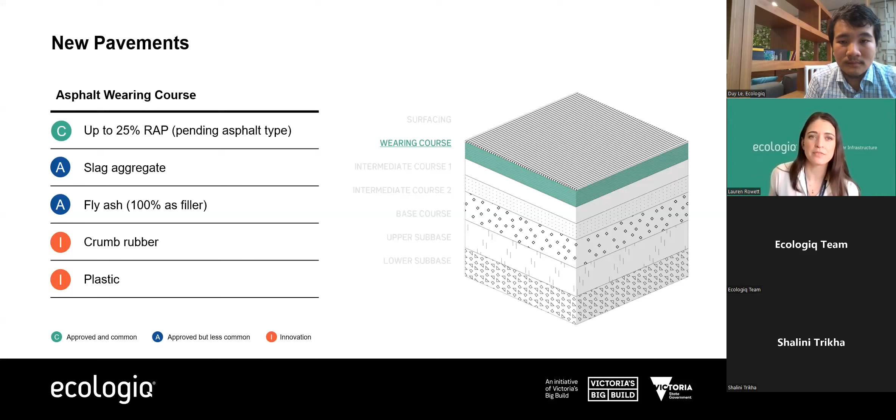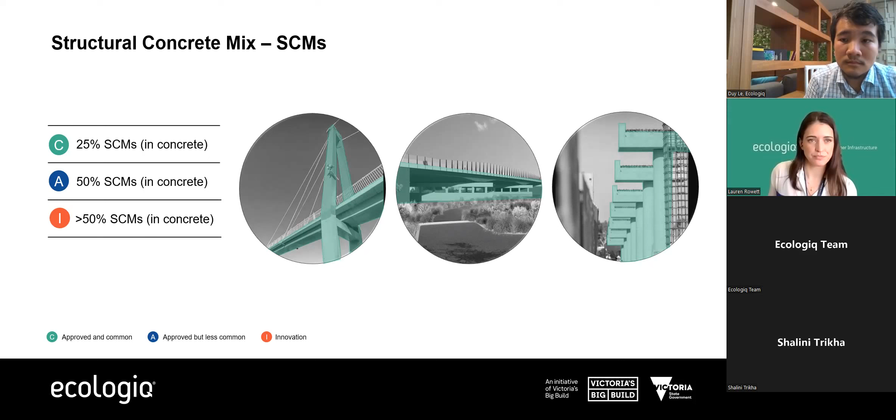Thanks, Lauren. Talk a little bit about a great case study that was actually featured early on in our Lunch and Learn series, I think it was late last year, earlier this year. The Western Program Alliance and the Level Crossing Project actually pushed the boundaries in terms of innovating and went beyond 50% SCMs in their concrete mixes. The mixes for structural piling, it was a project that was delivered with Holcim, Vic Roads of DOT, McConnell Dowell and Arup.

What they found there is significant obvious savings in carbon. We know that concrete is responsible for 8% of global carbon emissions globally, so any way that you can replace that is going to be a real win. By pushing the boundaries with that, the project had to seek approval from DOT, or Vic Roads as it's formerly known, and they were able to come up with a 61% recycled content mix, and again with that met the performance requirements of a 40 MPa structural concrete.

So great case study. If you do want to find out more, you can reach out to the Level Crossings team at Western Program Alliance, and they're happy to have a chat to you about how they went about that process. Thanks, Lauren. Thanks, Joy.

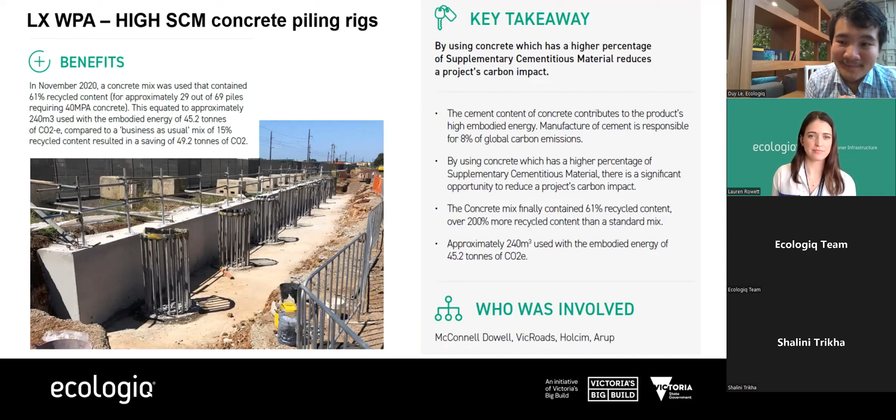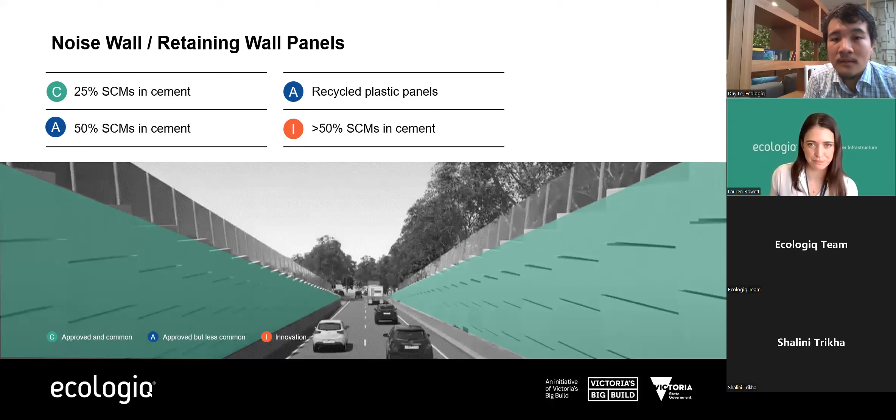Some of you may have seen the Mordialloc Freeway Major Roads project was touted as the world's greenest freeway and construction project, partly because of those recycled plastic noise walls made of 75% recycled soft plastic - that's the really difficult to move plastic that you bring to your supermarket. Noise walls really are only limited by your imagination.

They've been used previously on the Peninsula Link Freeway and the Monash Freeway. That's a concrete noise wall, but as those panels have deteriorated, they've been replaced with recycled plastic copies to fill those in. So when you're driving along the freeway, they're indistinguishable from other concrete products.

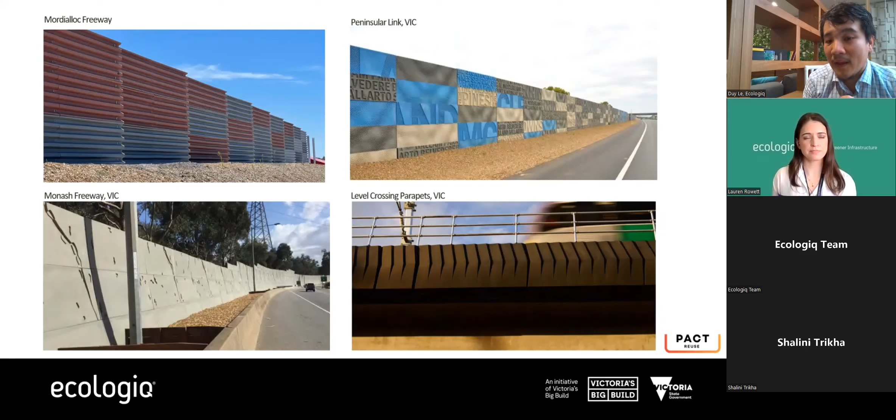For the Level Crossing project, they found those particular panels are made with 50% recyclate. The advantage of plastic is that it can be rotomolded, meaning it's hollow and lightweight. Not only can it put away a lot of plastic waste, but it has gains in weight saving and safety when handling at heights. Similar panels are being explored right now for other projects like Melbourne Airport Rail with elevated rail viaducts.

This trial has research from Melbourne University finding that it meets the Australian Austroads national standards for noise walls. So this project, Integrated, is now looking for a project to trial this type of noise wall to meet Victorian Vic Roads or DOT standards. If there are any projects out there looking to set up noise transmission absorbing walls, this is one to look at - another innovation. This stuff is made here in Victoria, and it can make a huge dent in our plastic waste problem.

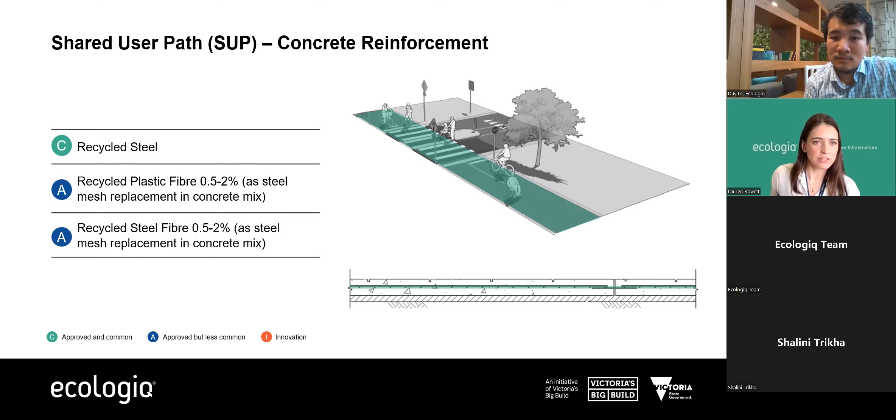The next one we're going to show you is shared user path, and here we're actually looking at the concrete reinforcement. You've got the diagram showing where a shared user path is with cyclists and pedestrians along it, and underneath, the technical drawing showing the reinforcement that goes right through the middle. This sits in non-structural concrete, and there are a few different plastic options as well - not always steel.

At the moment, there's a product on the market called eMesh. I'm sure many of you have heard about this already, but I want to take the opportunity to answer some questions and dispel some myths about its use. Firstly, there's significant carbon reductions in using eMesh, mainly because it replaces steel, which is one of the most carbon intensive products we mine for, and because of the weight of the product.

Your carbon offsets are already there. It has been used extensively across Victoria by some local councils on level crossing and major road projects, mainly in shared user paths. But it's actually been used for almost 20 years in Queensland, where despite some concerns, they found there's similar or superior performance to steel reinforced concrete, and superior properties in resisting - obviously plastic doesn't rust, but also resisting acidity and things like that in soils.

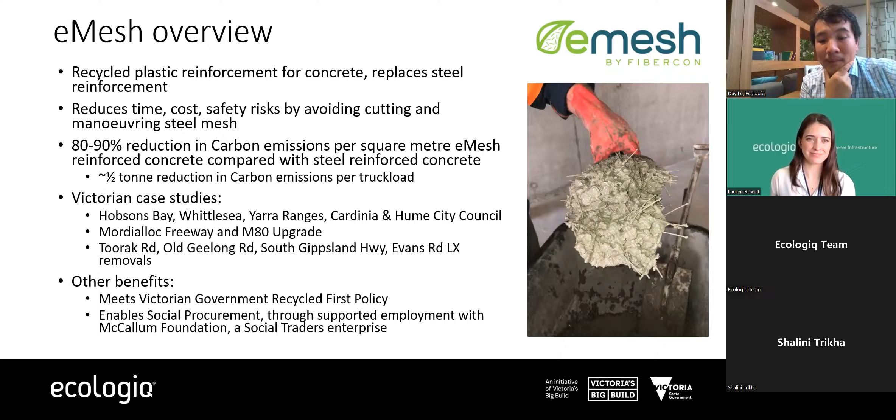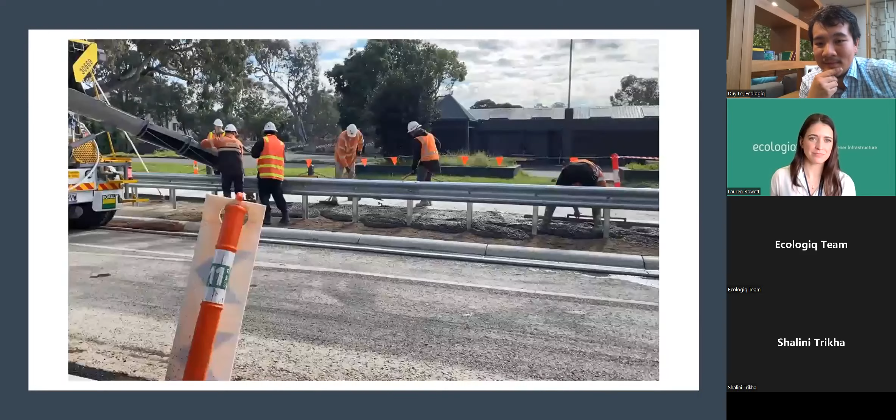From a workability standpoint - and that's the final product there, shared user path. There are some considerations in terms of workability when using eMesh.

That's in terms of finishing and pouring, but the important thing is that the subbies who have been using eMesh and pouring the stuff have found that once they understood the workability, it's been faster to lay because it's quicker to work with than laying down steel reinforcement. There's also reduced safety concerns. You can see from the finish that if it's done correctly, there won't be any eMesh protruding from the shared user path or any plastic fibers sticking out. Those fibers are UV stabilized, so even though they have a 40-year design life, they're expected to last a long time without degrading.

The next one we've got here is conduits. Conduit reuse is approved but less common - obviously, with all reused products, they must be serviceable and approved for their intended use. And then we've got recycled plastic as an innovation, something that is ready to trial, and in fact is in trial currently.

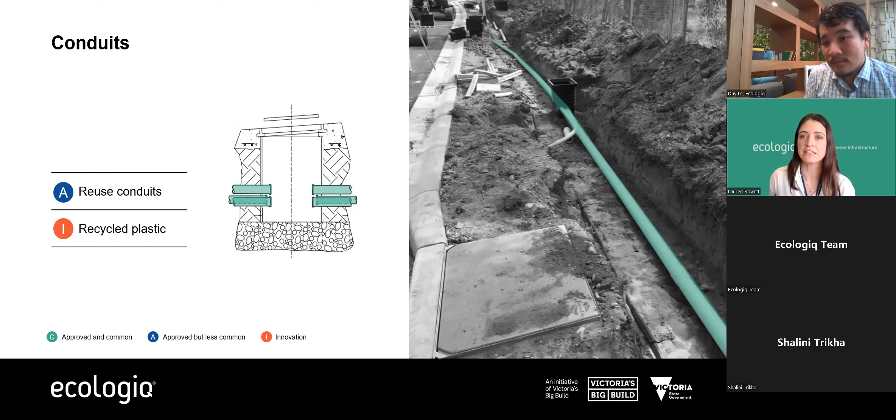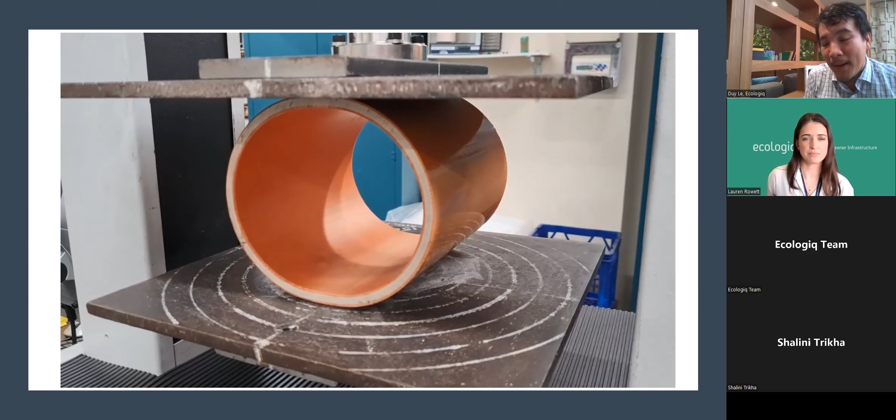So this is what's called a sandwich layer conduit construction pipe, where that white intermediate layer is made of recycled PVC, with virgin plastic only used on the outside. This is approved by V/Line for use, and the Shepparton Corridor project has laid over 130 kilometers of this conduit pipe. At the moment it's undergoing review by DOT, hopefully for approved use across Victoria.

It's important to understand why these conduit pipes are only 50% recycled in the center - it's because this is what 100% recycled pipe looks like. At the moment you can purchase from RPM Pipes and Green Pipes a 100% recycled drainage pipe. The only issue is obviously the color varies, and this is one from another manufacturer, Green Pipe. Since you can't control the color of recyclates, the industry has found a workaround with solid core recycled construction pipes. That's what those conduit pipes are for, and hopefully they'll be approved for use shortly across Victoria.

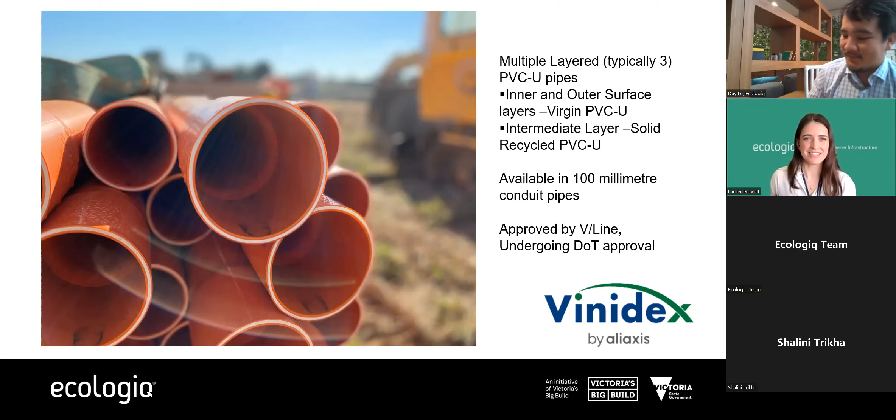This one's conduit bedding. As you can see, it's the same photograph we saw in the slide before with the actual conduits, but with a different part highlighted in green. As you go through the guides, you'll see some photos used multiple times, just highlighting a different section. Again, you've got the diagram here showing where the conduit bedding actually is, which in this case is a replacement of 100% recycled glass sand.

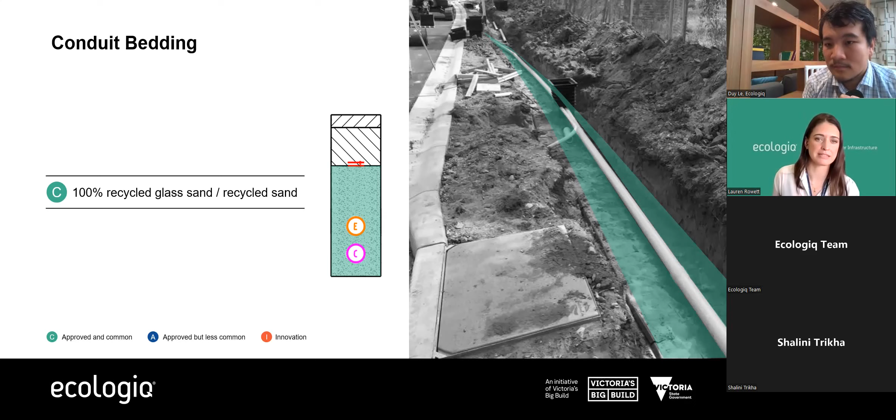Speaking of recycled glass sand, that can also be used in coloured surface treatments and line markings. Coloured surface treatments are very common, and line markings are a bit of an up-and-coming product as well.

One of the ones you can use right away today, no trial needed, is Omni Grip's high visibility surface treatment. This has actually been used already by the Level Crossing Removals Project at Reservoir Station - that's a photo of the surface markings at night. I thought we could do better and actually show you what it looks like in real life, so that's a sample there, and you can make it in different colors depending on what sort of pedestrian crossings, bus lanes, or surface treatments you need.

My understanding is the reason this hasn't been picked up more is that line markings and paint surfacing are often left to our subcontractors on projects. So if you're looking to use this, make sure you specify recycled glass sand or recycled products as an option when it comes to line markings. Otherwise you might end up with just whatever cheapest paint and line markings are available on the market at that time. Great product again here - Omni Grip, Smarter Road Safety makes them.

I do want to talk about recycled glass sand for a moment, because every time we run these sessions we get the same questions coming up around risk and handling, OH&S and silicosis. So I actually have a sample here of recycled glass sand - I'm not sure if you can see it there.

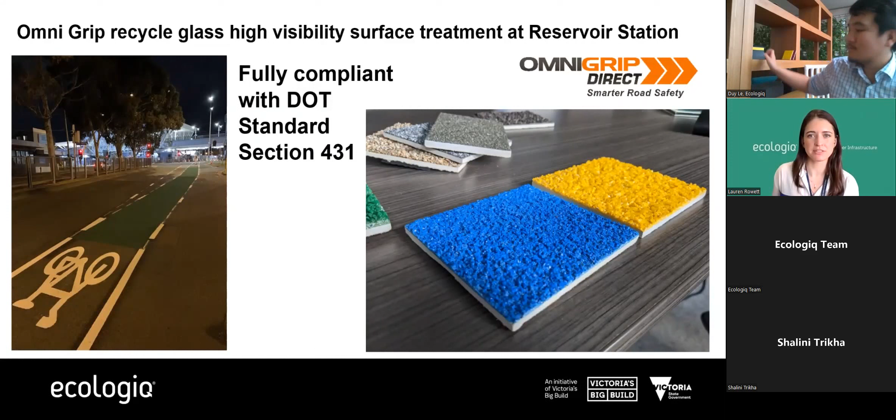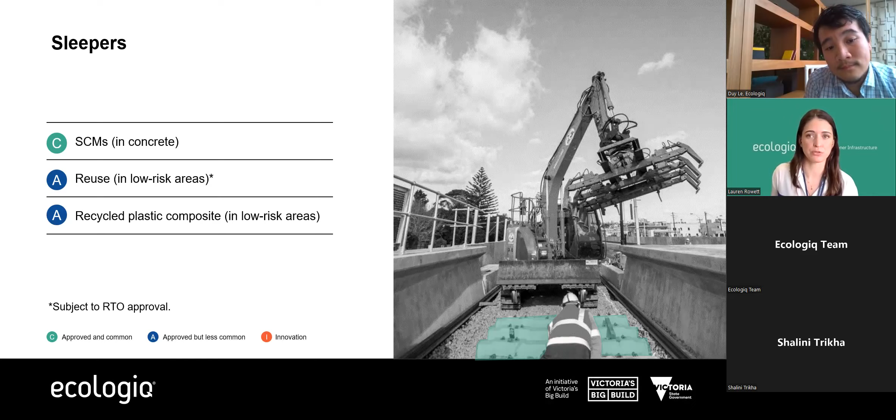This is a real story of homegrown success. Integrated Recycling manufactured the DuraTrack sleeper, made from recycled plastics right here in Mildura, Victoria. It's already been type approved by MTM and V/Line for low speed use, so for the regional rail revival program, level crossing removals program, stabling yards, low speed sidings, turnouts, and any low speed application, you can use the DuraTrack sleeper. It's a great sleeper in terms of timber replacement.

At the moment it's still undergoing trials with ARTC. Again, in terms of putting away tons and tons of plastic, these have at least a 50-year design life, but are expected to last a lot longer, easily outlasting timber sleepers, which need to be replaced every 15 years on average. Great product.

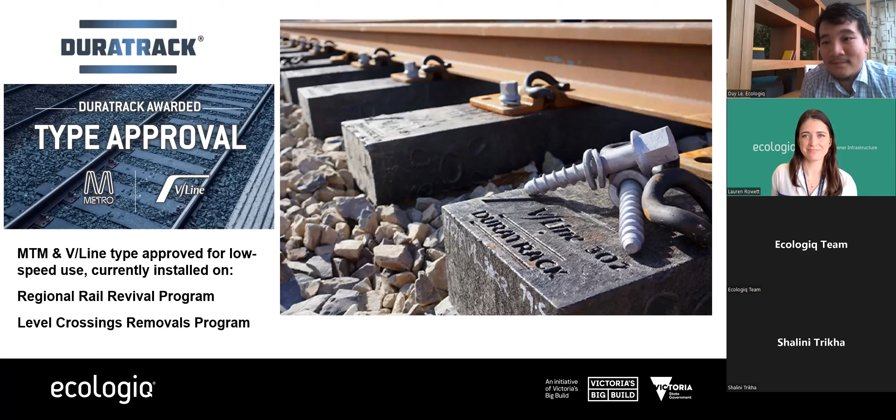Next we've got, here you can see a few different options. They're all approved but less common, so really good opportunities to optimize on projects here. And Duy, I think you have a wheel stop with you as well that you can show us.

I do, so we have a few samples of these. These ones are made by Plastic Forest, Australian made right here, I think in Albury, just across the border. When speaking to projects, I visited one recently and saw them installing wheel stops in car parks. We asked them why they hadn't considered recycled wheel stops, and often this is left up to the subcontractors to decide what products go into there.

Now, these meet Australian standards. I've seen these installed in places like Kakadu National Park, in the Northern Territory, and in far north Queensland, where they recognise the benefits of using a recycled plastic wheel stop rather than an import, which is what these often are. So my key messaging is don't skimp out on the ancillary applications, each one of these packs away a significant amount of plastic.

For me, it's quite a significant paperweight that I don't need because I don't have much paper on my desk, but certainly when it comes to wheel stops and parking bollards, have a look at that as well, because whether you have recycle-first requirements or are trying to meet sustainability targets, it's great to explore and make sure you're maximizing and optimizing every opportunity on your projects.

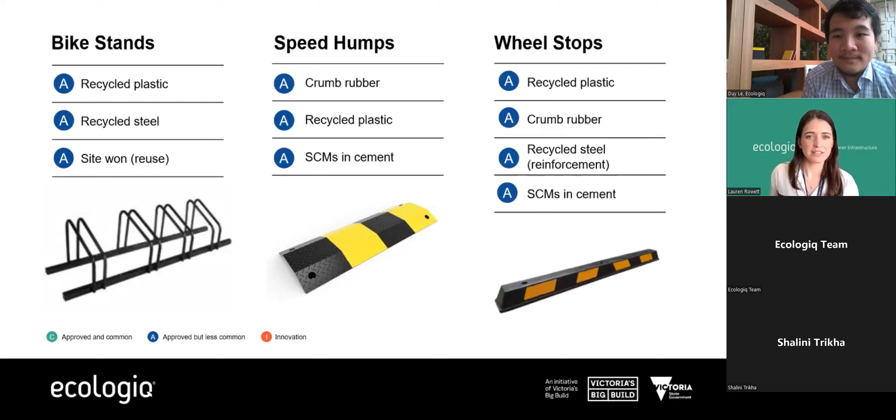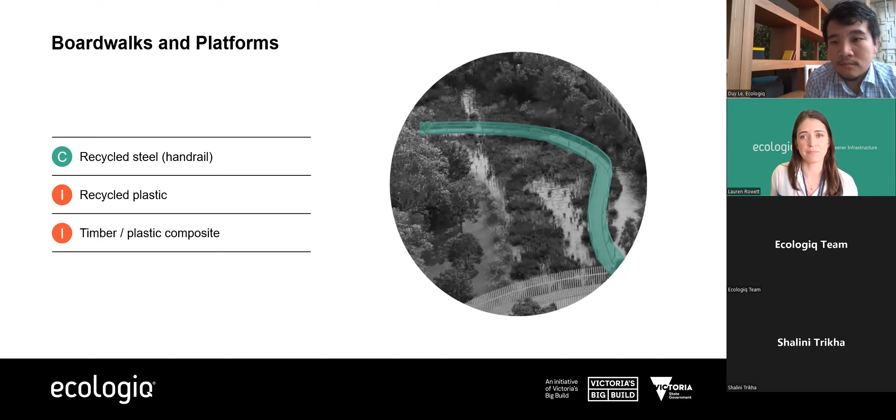Although it's an innovation, recycled plastic has actually been used quite widely for boardwalks in places like national parks, and you often see them leading down to beaches as well. So there are lots of use cases, but just an example where it hasn't quite cracked the transport infrastructure space yet. And then functional fitness equipment as well - we've seen a few designs come through lately that have a bit of gym equipment, so there are actually some recycled plastic alternatives for those too.

Thanks, Lauren. I just want to take you on a quick tour of some of the recycled plastic products already available off the shelf. The key messaging here again, when we speak to the manufacturers, they are looking to hear from you what you want. Recycled plastics can be made to look like existing products, and as you can see here, some of these are meant to look like timber or potentially like steel roofing for shade structures.

Steel roofing for shade structures. If anyone's building a boat launch ramp, you can use them as well. Obviously, being plastic, it probably is better in a marine environment than other products. You jump to the next slide, please, Lauren.

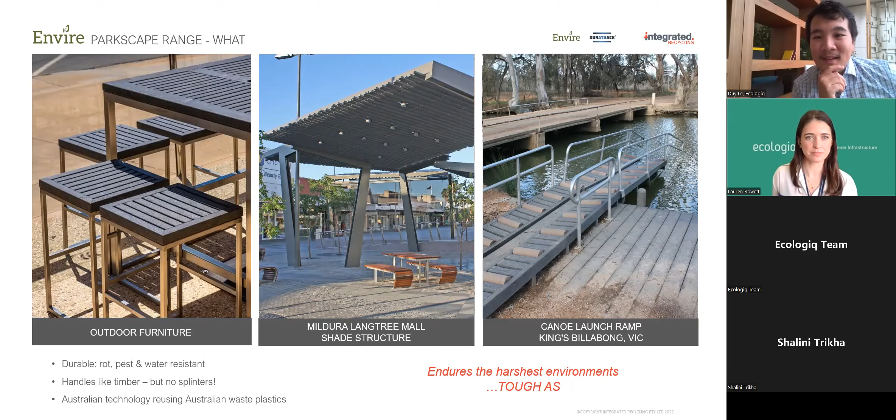But boardwalks, retaining walls, and bollards as well. So this is a range that's made by Integrated. They use agricultural plastic waste in their manufacturing, and it's up to 85% recycled waste.

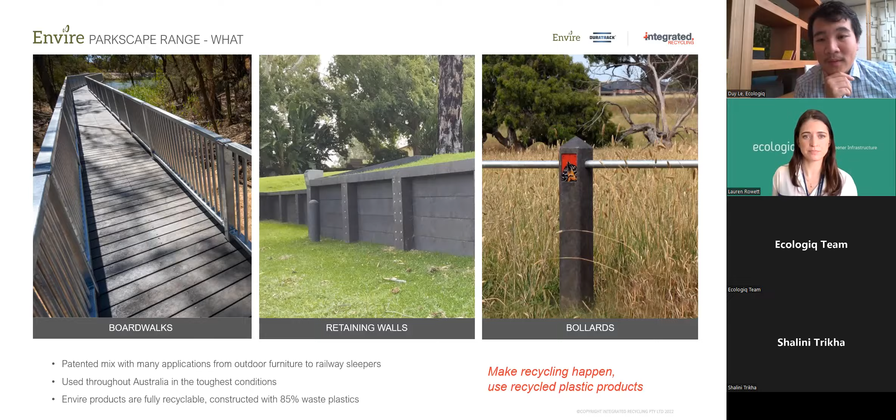When we jump to the next one, we'll have a look at some of the products made by Replas. Replas actually use the soft plastics from the Red Cycle program. So if any of you are taking your soft plastics and chip and chocolate bar wrappers back to your supermarket, this is what it's going into.

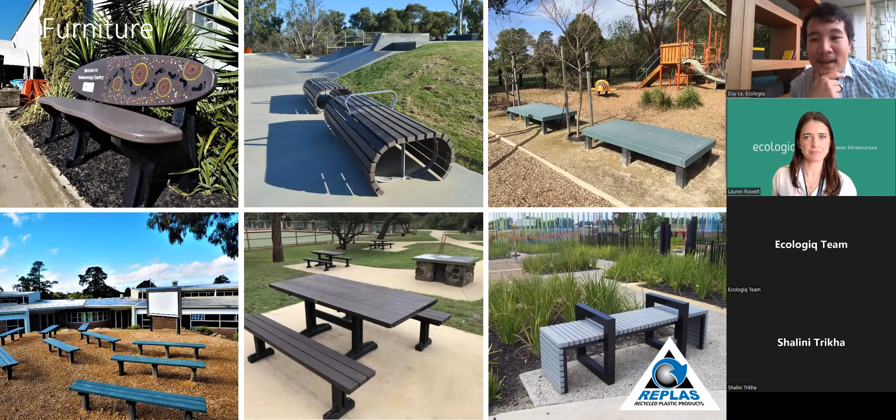Again, with all the different park benches and options available to you, I think we do want to dispel the myth that recycled plastic can only be turned into your bins. So I think you could see here that the range is quite exhaustive, and the options are really only limited by the imaginations of any designers and architects that might be here on this call.

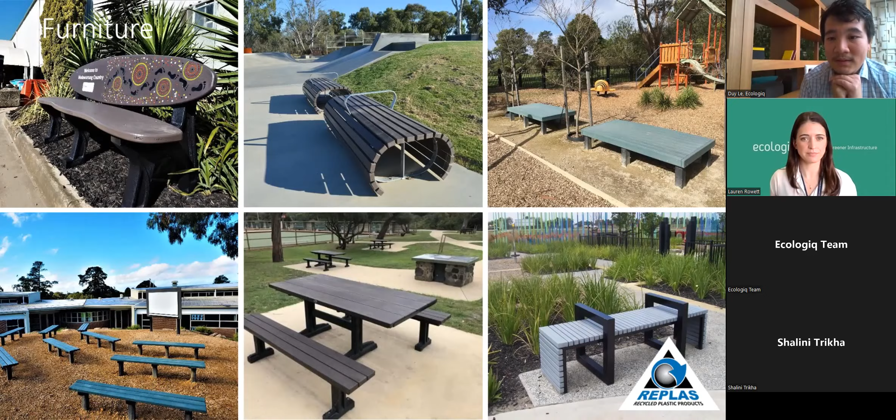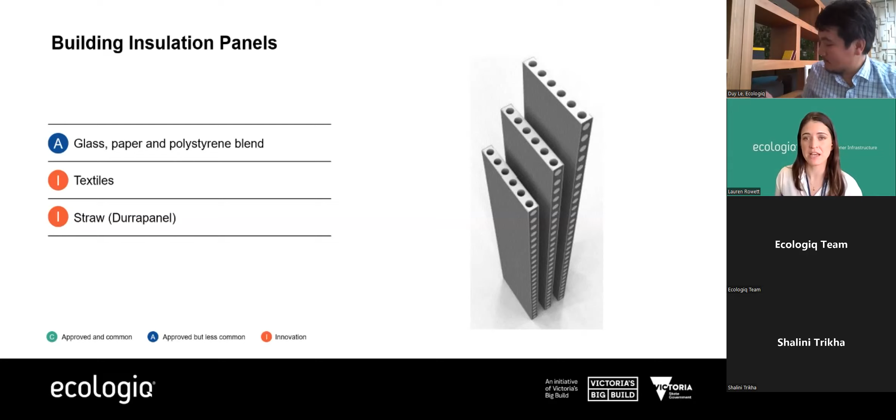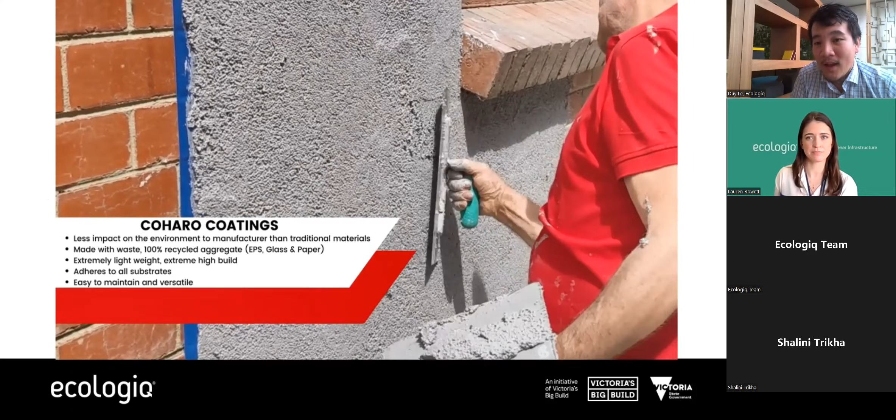But also glass, paper and polystyrene blend, Duy. Yeah, so this is a great little product that's available right now, called the Coharo coating by Casafico. That is a leveling coat. It's not shotcrete, but if any of your projects are using shotcrete and you need to do a follow-up leveling coat, you can use the Coharo coating. It can be applied by hand, as you can see the gentleman working with it, or it can also be sprayed on. It's made from 100% waste, and it's been used in the Melbourne Metro Tunnel to do some leveling works down there. So although they may appear small, it's a significant use of really problematic waste like polystyrene, glass and paper.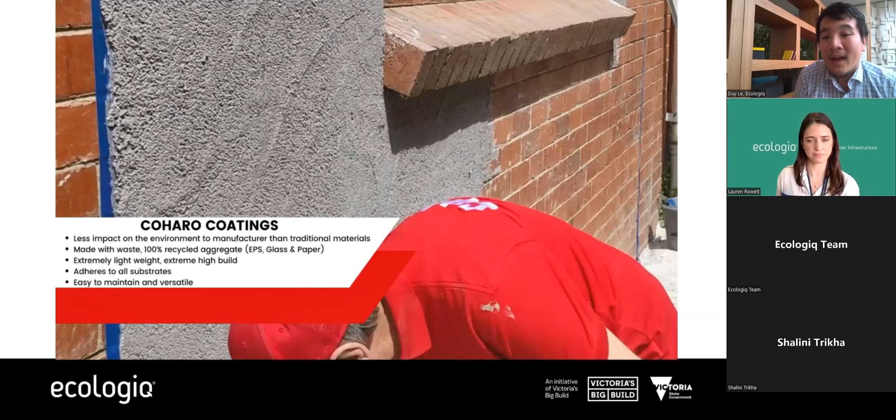Thank you, Lauren. I might take a moment to talk to you about our reference guide. Lauren said earlier that the visual guide is best used as an accompanying piece to our reference guides. So for those who don't know, ecologiq has issued now 4 reference guides that are freely available on our website and also on our Knowledge Hub. And the reference guide acts as a one-stop shop, a bit of a handbook that's collected all the standards and specifications that permit for the use of recycled materials.

So you need to jump to the first one, Lauren. So we have a reference guide in road infrastructure. This guide actually collects—we've reviewed the Department of Transport and also the Australian standards, and identified all the relevant standards and specifications that permit, or that are performance-based, that allow for you to use recycled and reused materials.

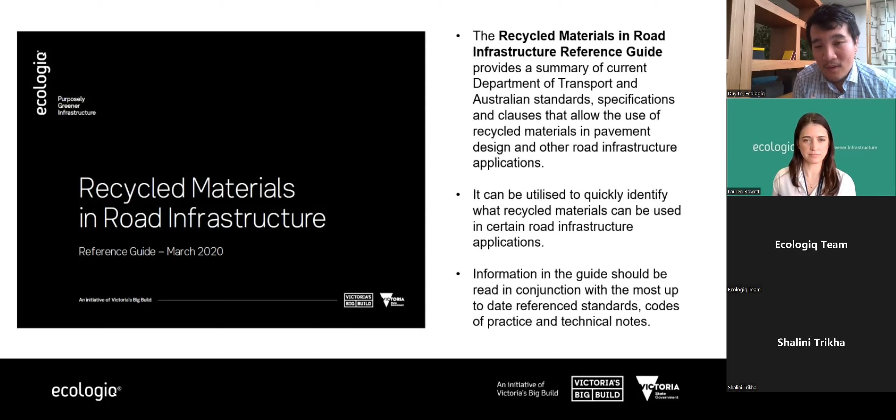It's a common barrier that the first question we often get is whether this is in standards or spec. I say consult the guides because a lot of work's gone into collecting this. You can see when you open up the guide, you can look at it by material application, and see what materials are permitted. So if you're looking at pavements, you can see what recycled materials are permitted. Within the guide there are live links to the actual relevant standard or specification, so you can look up exactly where it permits the use of that.

I'll add a proviso that these guides were first published in March 2020. We're going through a review currently, and for the next iteration, our technical team has been doing a lot of work with DOT and other bodies to reform new standards and specs. For example, if the conduit pipes we spoke about earlier are finally updated, you'll see them show up in new versions of this guide as well. The next version will also include road stabilization, an area well practiced in other states but hasn't seen the same level of adoption in Victoria, despite the advantages of stabilizing and recycling existing roads before building new ones.

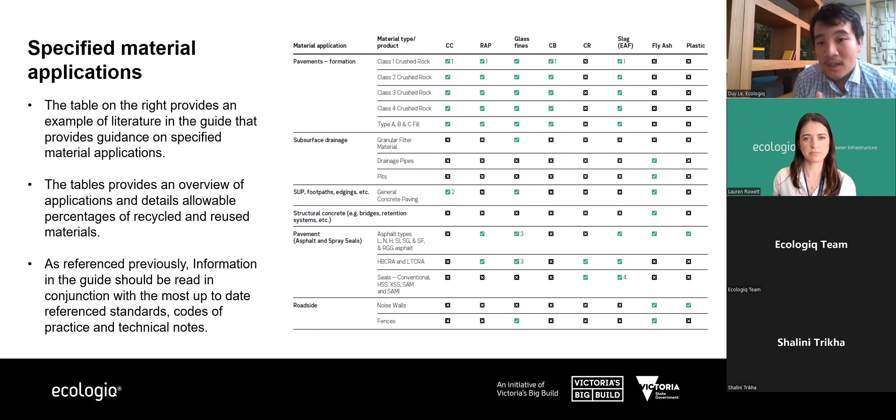So next slide. We also have a guide to rail infrastructure. Here in Victoria, if you want to use recycled materials, often if they're safety critical, you need approval and type approval from the rail operators - so that's MTM, V-Line, ARTC, and if relevant, VicTrack as well.

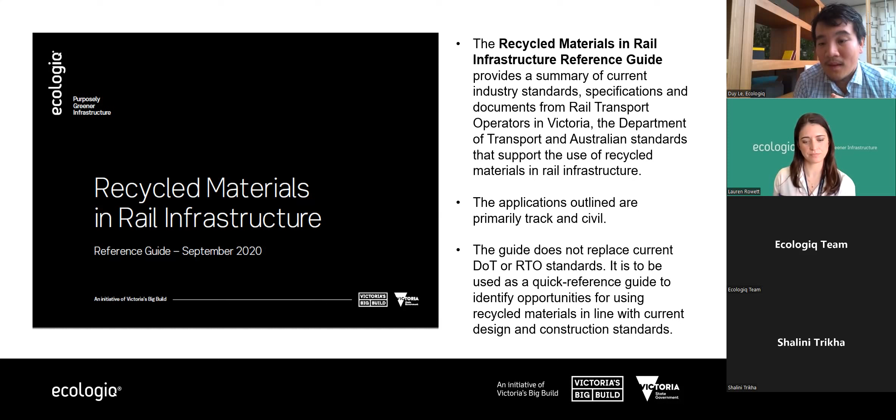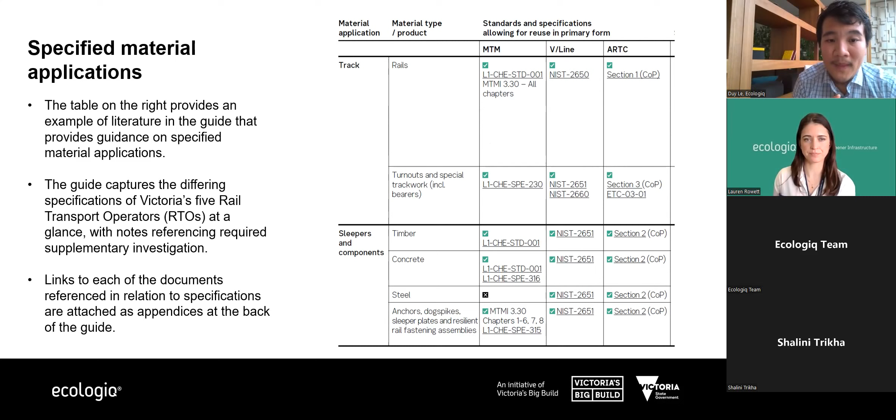We've collated all the standards and specs from those operators. If you jump into the rail infrastructure guide, you'll see things like the standard and specification for reusing track or using different sleepers. Again, the document has live URLs where you can look up the application you're looking for, click on it, and it'll take you to the right type approval, standard, or specification that permits the use of that application and material.

And last but not least, as I've mentioned before, ancillary - I call this the other - so all the bollards, fencing, everything that isn't road or rail but has significant application. From landscaping to roadside fencing, it's often non-safety aspects, but can certainly make a real big difference in using our recycled and reused waste streams.

If you jump into this reference guide, it covers everything from signage, pavement markings, pipes and pits. Again, this collects not just DOT standards but Australian standards as well, for what applications and materials you can use. For anyone looking to use our visual guide, I do say to really consult the reference guides as well, because that will show you the standards and specs that allow for the use of these materials. We should be republishing new versions of these by the end of the year.

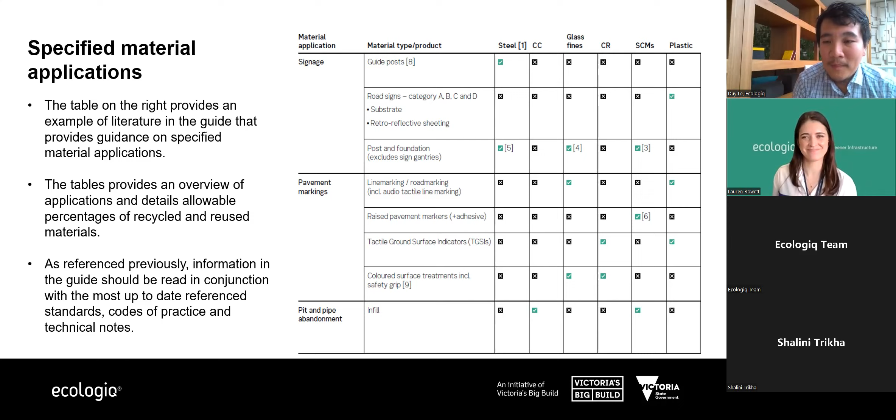So I guess once you know what you want to use and you know that it's allowed, the next thing is to find a supplier. So I'm just going to do a quick demo of the supplier map. Bear with me whilst I sort out my screen share.

So this is our supplier map, which can be found on the Knowledge Hub. I just want to give you a really quick tour through it. Each of these black dots represents a supplier in Victoria of recycled materials. Am I screen sharing the right side? Yep, cool, just checking - too many screens here, I'm not sure which one's up. So there's a few different ways you can search.

You've got application category to start when it loads. We've developed this list of categories alongside the users, really trying to make it as simple as possible for contractors, government side, and delivery agencies to use this. You've got aggregates and fill, asphalt and spray seals - for example, if I was looking for asphalt, I can just tick that and it will filter down to all the suppliers. You can scroll in and out as you would on Google Maps, and then just click into any of the dots near your project, and all the information will come up.

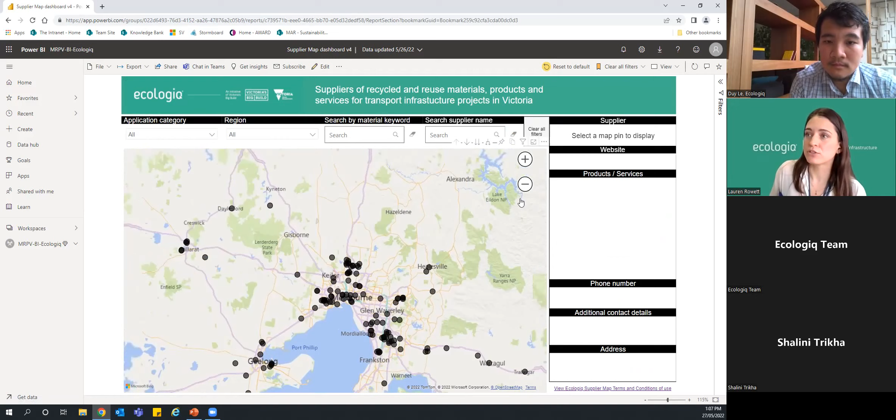I'm just going to hit clear all filters. You can also search by region. Eastern Regional, for example, we'll scroll into just those Eastern Regional suppliers.

You can search by material keywords. So if you wanted something made out of plastic, you can just pop that in - obviously quite a lot with plastics. Or if you were looking for a certain application, so you know what kind of pipe you wanted, for example, and didn't want to see all the pits as well, just put the word pipe in and it'll come up with just all those pipe suppliers.

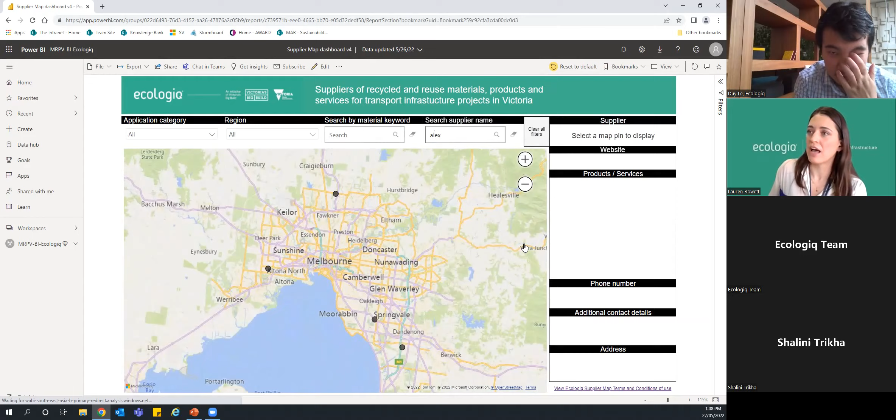You can also search by supplier name. So if you know that Alex Fraser do a product you're looking for, you can just pop in Alex and it'll come up with all the Alex Frasers. And that's it, it's pretty simple really.

And Duy, I think you're on this one. Yeah, I just wanted to give you an idea. I mean, most of you, I think, will be aware that ecologiq exists to support the industry.

But it's also there to ensure that when we rolled out the Recycled First policy in March 2020, we're seeing the outcomes. This is a great case study where we compared two arterial road projects, one that had the Recycled First requirement and one that didn't, and looked at the amount of recycled material used on the project with the policy applied. In comparison, we saw 5 times the amount of recycled material overall - 2.5 times more reclaimed asphalt in the pavement, 65% more recycled glass, and 60 tons of recycled plastic, up from next to none.

To give you context, when it comes to our most pressing priority waste streams here in Victoria, and I'd say Australia, plastics, rubber, textiles and organics keep topping the list, because those are the materials we have plenty of but don't have enough uses for. So we think the Big Build and the projects here, and even smaller construction projects or procurement opportunities, even with local councils that might be on the call today, are all integral to making valuable use of that waste stream. So the policy is showing very, very strong impacts.

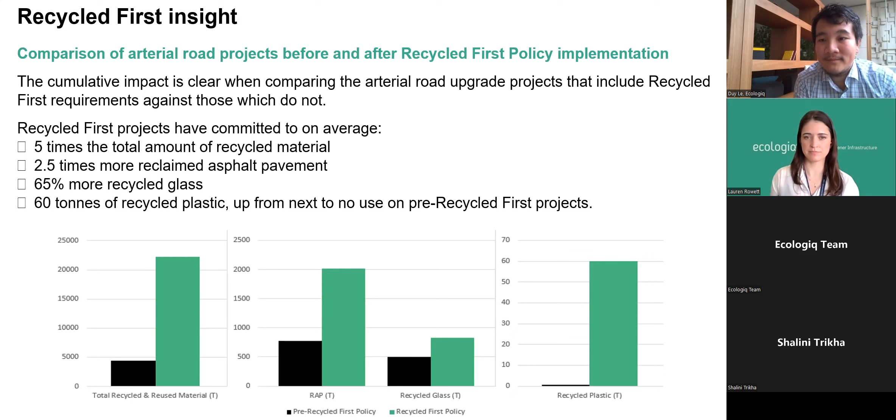In terms of what's next, I hope you've enjoyed today's Lunch and Learn. I think we've run a little bit over time, but in a couple of weeks' time we'll be having our Innovation Showcase and Exchange. This is our bi-monthly series where we get businesses to come and showcase what they can do. This one's a particularly special event - we're partnering with Kinaway, the Victorian Aboriginal Chamber of Commerce, and Social Traders, the peak body representing social enterprises. We're getting businesses that might be manufacturing or looking to enter partnerships with the sustainable recycled supply chain for our project to present to us. So please come along to that - you'll meet some great businesses, and through the exchange we're going to match you to meet with some of those organizations.

With restrictions easing and returning to a post-COVID normal, ecologiq is also running our first conference, which will be on the 6th to 7th of September. The expressions of interest have gone out, it was announced by the Minister last week, so please save the date. It'll be at the Melbourne Exhibition Centre, we'll have a trade show and lots of great speakers. We're going to talk about how greener infrastructure is absolutely the way forward for not just Victoria, but hopefully Australia as well.

Now I think Shalini might be over to you for, any questions we might have. We've got a couple of questions - that's a great session, lots of information. First question is: using glass for recycled sand, is that the best value use of glass? Yeah, I'm happy to have first run at that, so a great question.